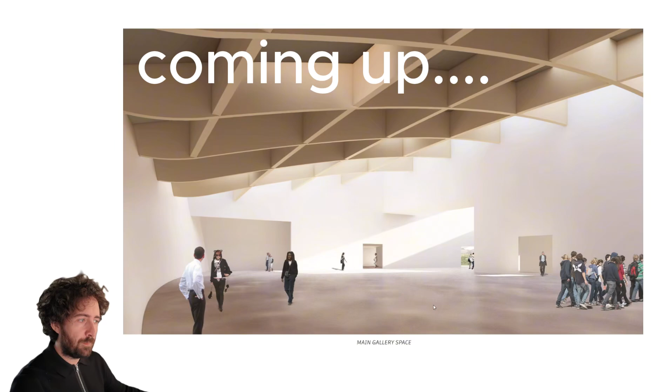I think this is a nice image, but this is a big empty room. What are these people looking at? What have you come to this museum to see?

I can't read this title. I see this little orange translucent fish-looking thing here, but it looks really nice actually, I think. So we have a roof garden, we have this big opening here, we have a canopy there, so that is the entrance. So that's a good image too.

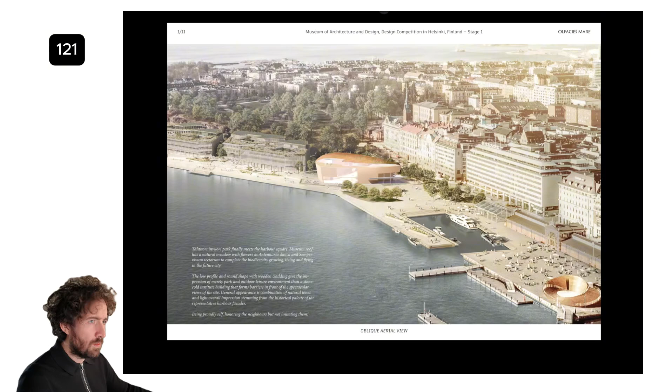New museum gathers its inspiration from a modest Nordic approach. Nordic?

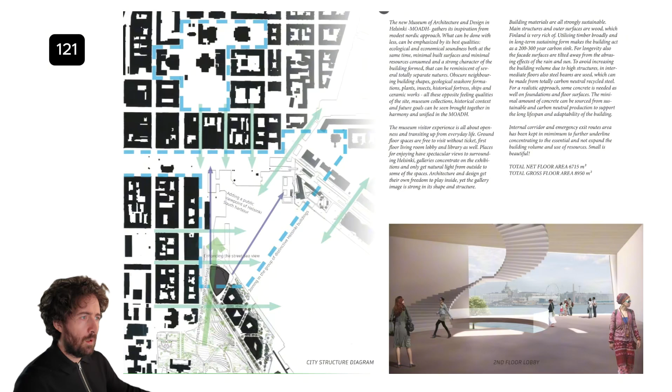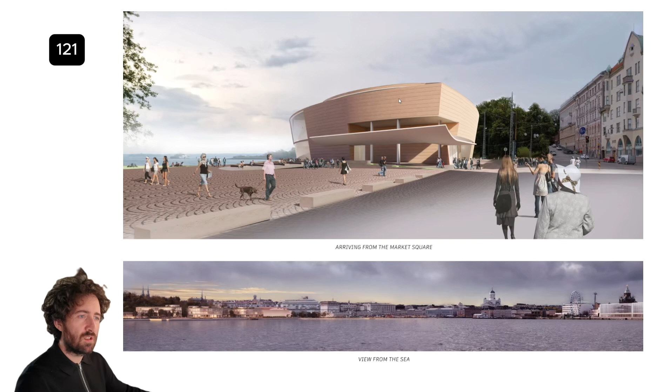Image three, really big swoopy canopy here. It looks a bit bare, like it's sort of missing some stuff. Not a lot of real detail in it.

Image four. I like this interior space, I like the parametric coffered ceiling. I just wonder why this is solid here. Wouldn't this be more interesting if the light could come in through the ceiling? I think it sort of does that here and here, but not everywhere else.

I think this is a nice image, but this is a big empty room. What are these people looking at? What have you come to this museum to see? It's a little bit like, is the room itself the exhibition? Have these students come for a study trip to see the space, or have they come to see the contents of the museum? There's nothing here. It's a nice space, there's nothing here.

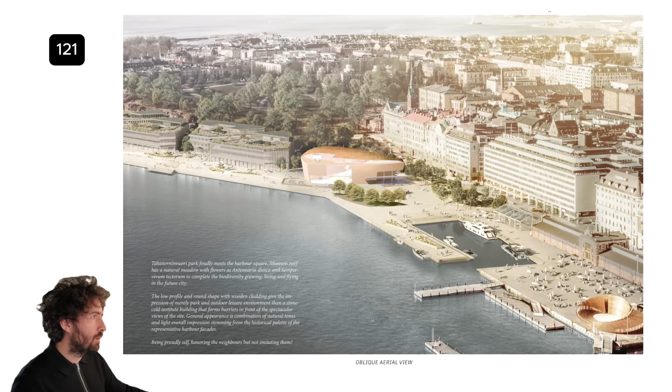122, People's Podium. Yeah, seeing quite a lot of podiums. Again we're doing a turn around. A lot of stairs. I'm sure someone in the comments will say there's a lift inside that can take you up here. That's not the point, and if people haven't caught on yet, that's not the point I'm making when I'm critical of these big, giant external stairs. I don't know what else to say.

Interesting though, I don't think this looks that bad overall. It is a design podium that showcases Finnish architecture. Oh, that's cool, like a little bit of a sculpture garden thing happening here.

Much more. There's not a lot of X factor to these proposals that do this, that make this move. I'm yet to see one anyway. A lot of architects are doing it.

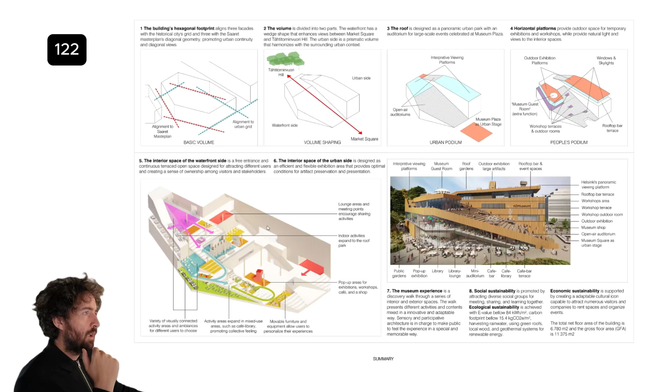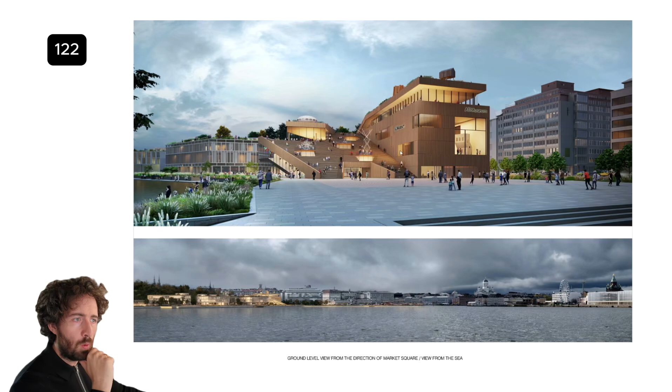It's a nice image, yeah, nice to see some actual gallery content in here. I like this little treehouse up here. This is cool, I wonder who gets to stay there overnight. Oh, I'm just joking. Little UFO dude, love it. Nice image overall.

Yeah, I do feel sometimes like Snohetta have just kind of broken public space design in general, in that everyone sort of makes these kind of moves now.

What's he doing down here? He should watch my videos.

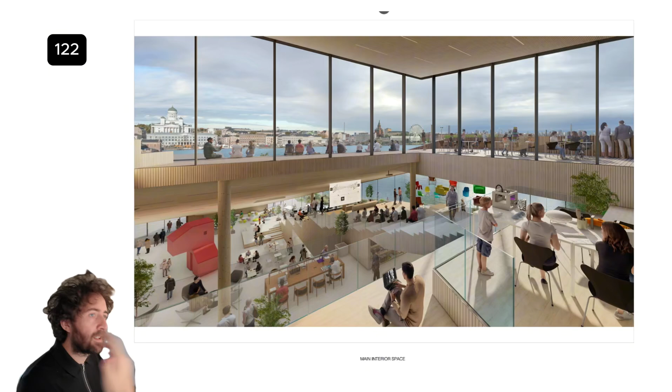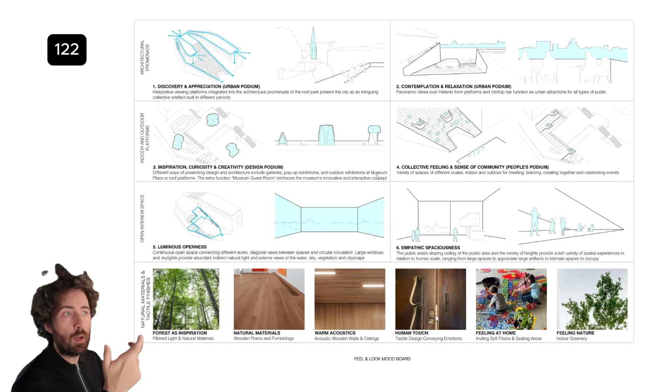But it's not bad. It's a good image, good professional image. It's just the design isn't really getting me excited. A lot of diagrams, clear diagrams, all very nice. I think this is a perfectly competent project, it's just I've seen versions of it already, some way worse, some way better. It hasn't really distinguished itself in the 122 that I've reviewed so far.

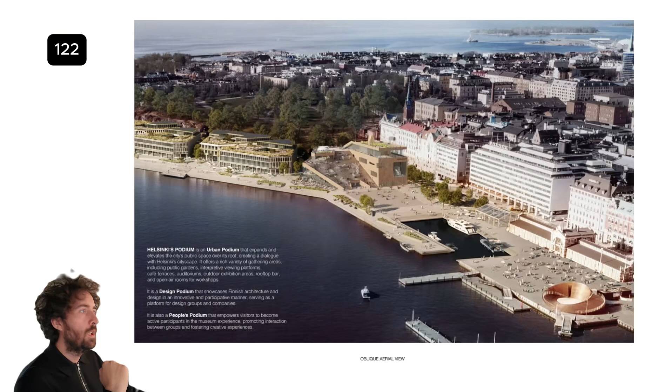But that's not your fault, it's just the order in which I've come across your project. Moving on to the next one.

123, the Little Proteus. I always find, okay, seeing Aalto Vase here, but I always do find that the projects that make this kind of isolated, curvy, circular block with the vertical facade elements generally underwhelm me every time. But let's have a look here. This one has a little bit of spice in it, in that there's a setback and there's a nice colonnade here, which looks quite nice. I do see the reference quite clearly in this, maybe I'll be proven wrong, but this one could be quite nice.

So let's see, image two, design concept. Looks a bit like an intestinal tract or something, like a squashed little pipe. Looks very bioorganic or something.

I don't know how you would resolve these really extremely acute angular details in here. I'm not really sure how these spaces would actually feel. I wonder if there wasn't a way.

I find it really interesting that the geometry of the external skin is actually almost applied in a parallel way to the inner skin, and I don't think that was probably required. For example, let's just imagine this as one solid mass and ignore the central courtyard. I bet there was some flexibility here to make something different in here, even just in terms of shape, because what they've done is they've actually continued this on the inside as well. And it makes for these really uncomfortable spaces, although the structural details might be quite interesting.

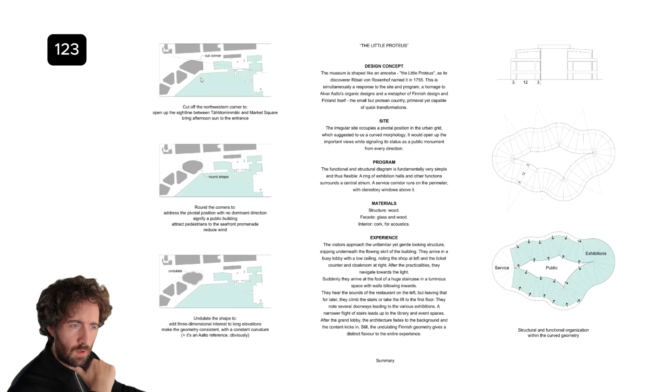There's some nice process diagrams here explaining how they've arrived at the shape. See, undulate - it is funny. Okay, maybe I'm being unfair, maybe there will be zero reference to the Aalto Vase in this project, but you don't need to explain to me how you've ended up here, because I kind of think I already know how you've ended up here.

But that's okay. Image three - I think this is really nice and playful. Yeah, it just looks really, it looks fine. It's quite peaceful, it's quite playful. It looks well considered from the outside.

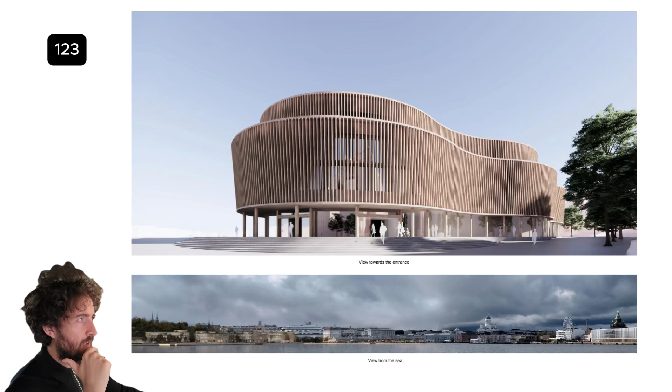I do wonder though, it looks to be that there's an internal lining in here through the screen, almost like there's another grid in behind this. And I do wonder about the quality of daylight. I also wonder about how that space feels on the inside, that verticality being so relentless. I'm always concerned about spaces feeling prison-like, and there's not a lot of opportunity here really to offer a view anywhere else unless I'm reading this wrong. It's quite relentless. It would be nice to see this sort of language, this rhythm, disrupted occasionally to free up some window space, some openings, just to give people a little bit of a breather, because this might be quite an intense space to be inside, especially on an overcast day.

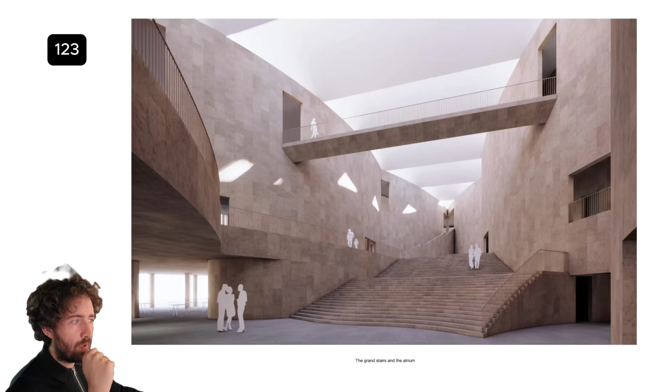Well, it is quite an intense space. Actually, this is really cool. I think I like this quite a lot. Again, though, you can see this here.

There is absolutely a little architectural game being played here, but I don't know if I want to give the architects credit that that was the intent rather than the consequence of the decisions they've made with the massing, in that I do sort of love how this threshold here is mirrored and it's pivoted on a singular column that resolves this super tight little pocket here that creates this opening above it. The little architecture nerd in me sort of wants to dissect this alone and just ignore everything else and think about that as the basis of an architectural project. But I will not be doing that here. So maybe I'll give you the benefit of the doubt and think there was some type of rationale involved, but I actually just think it's a consequence of some of the more fussier details in the project.

This is quite nice. It's a really interesting project. Maybe it feels quite cold in a way, although the tones are quite warm - the daylight here looks quite warm, but I mean cold in that it's quite raw and quite stiff. I don't know, maybe it's the stone.

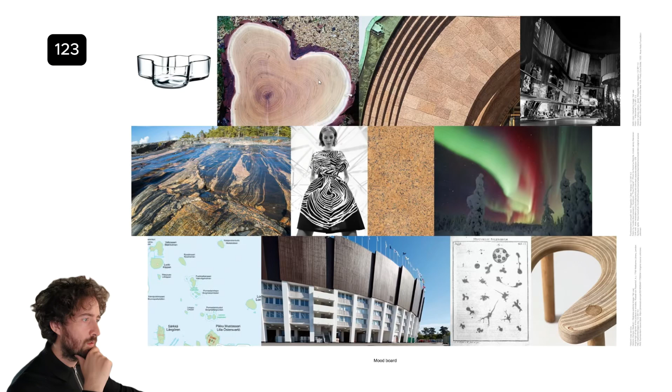Panels here, the cladding that's being used - I think this is really cool. I quite like this interior space. References - oh, that's a nice reference as well. Yeah, some Aalto going on.

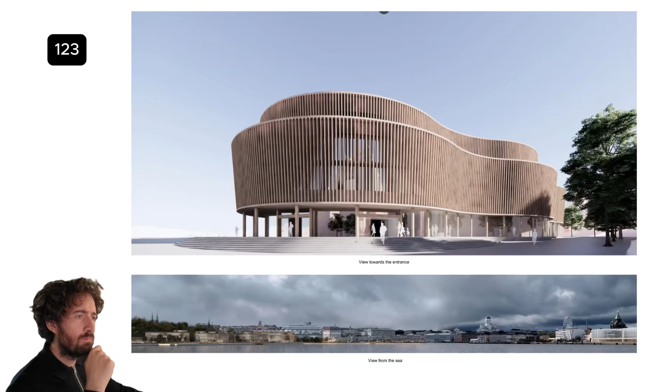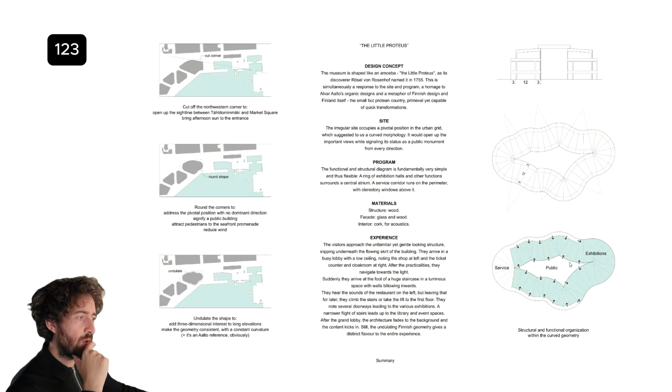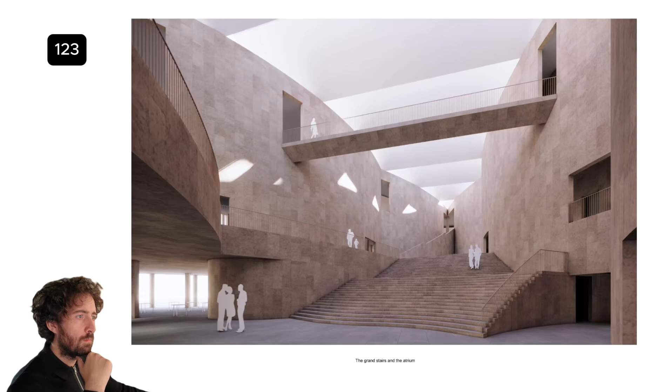I wish this one had a bit more time. Not a big fan really of the inner lining, although seeing the internal lobby, the interior, that's really exciting. I never would have guessed that space would have been as resolved as it is based on this diagram, but kudos to you, architects. Needs more, I think, overall.

But as a piece of architecture, I think it's got potential big time. So yeah, I think I like 1, 2, 3. So nice. Gonna move on. 1, 2, 4. ADM 360. Big green roof, big circular opens, big undulating facade, multiple little volumes here, lots of green space outside. It looks a little bit like a golf course.

Nothing is as dangerous in architecture as dealing with separated problems. If we split life into separated problems, we split the possibilities to make good building art. Alvar Aalto. Who am I to dispute the late, great Alvar Aalto? Dealing with complexity is the fundamental task of the architect's work, unless that complexity is self-imposed, which I would argue is often the case with a lot of these projects, but I will bite.

Let's see what we got next. Image 2. Yeah, nice photographs. Interesting, complicated diagram. And I think you have a complicated diagram because from looking at the massing here, you have a complicated project.

There are a lot of little pieces, a lot of these little cuts, and a lot of these little nooks and crannies suggest to me that this has primarily been designed in plan, and then it has sort of been applied then to 3D in a weird way. It's almost as if the plan has been sort of projected into this 3D mass. Now, I'm not going to critique anyone's individual design process. It's just that's how I'm reading this, and that you can almost see the brief, the programmatic brief in 3D sort of applied to these spaces, and there's not a lot of flow between them.

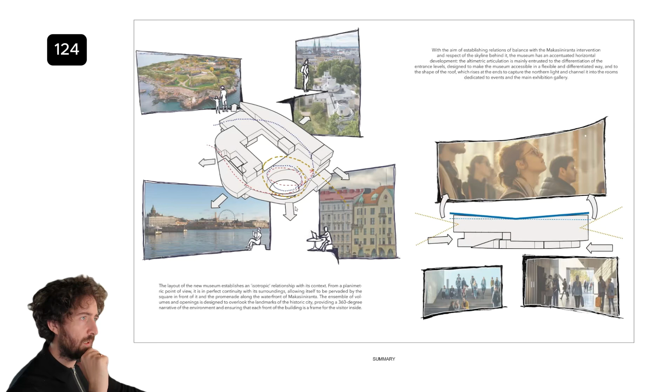I'm going to hold off on being too critical of how the tree would actually work and grow, but I think that looks like a beautiful little space, although it could be quite dark. But I think this is a nice idea. And then that sort of goes into this curvy space that has this interesting diagrid-like screen with these openings above it. I think there are a lot of big architectural ideas here. I'm just not so satisfied that it's all coming together in a way that's super clear.

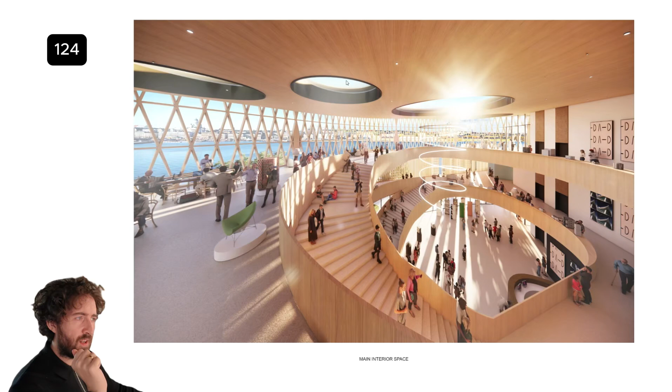Less exciting on the inside, but it might be to do with the quality of the image. Not a big fan of lens flares in general. It's fine, it's good. I think it has potential.

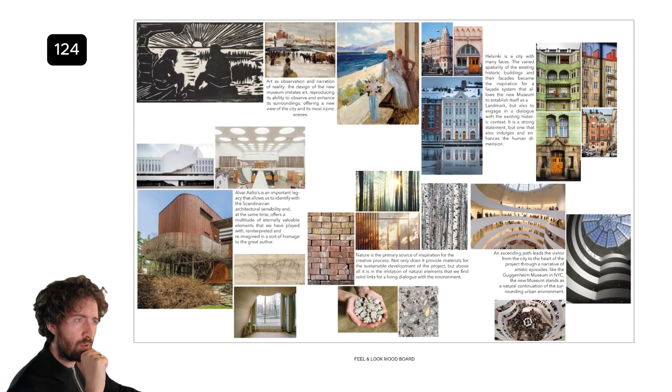Like the last one, some really nice references. I love it when there's some classical paintings included, just like paintings in general. Good, don't love it, a lot of questions. I think it probably, rightfully, as they all do, needs another revision, another level of work. They might not get that. They might not be invited to stage 2. That's fair enough. Not bad work.

Just one, yeah, like for example, this little thing here. It's so subtle, I almost wish this sort of idea was applied to the entire scale of the project. This idea of disrupting the mass with these pockets of open air light wells instead of having these kind of artificial light wells. That seems to be what is most architecturally intriguing to me, this corner. I wish that was applied to everything. But I'm not the architect, I didn't design it, it's just my opinion.

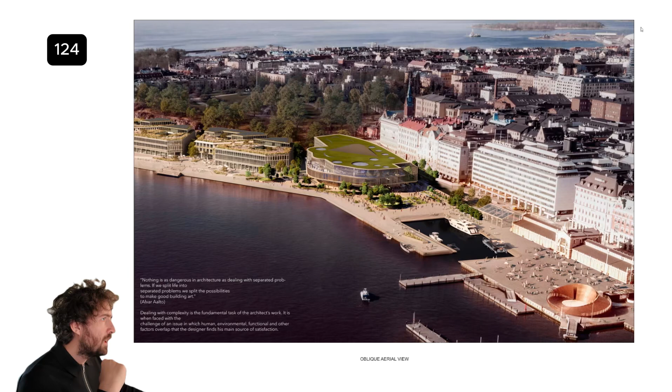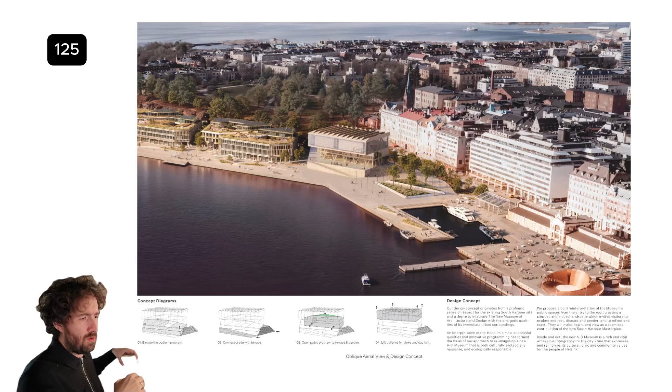Anyone who's noticing, I'm not drinking coffee today, I'm drinking water because I am over caffeinated. Way too caffeinated. Joke, I'm still drinking coffee. Don't be ridiculous.

Okay, this looks really cool. Already I sort of like the way that it's sort of just positioned here on the site. Diagrams look sort of interesting.

Explain to me your design concept, number 125. Originates from a profound sense of respect for the existing South Harbour. An interpretation of the museum's most successful qualities. Fair enough. Let's see image 2.

Again, this one isn't... I do feel like Project 111 was not as well received on the last video as maybe I thought it might be, but I do think that they have done quite well. That's a very good example of a project that resolves the complexity of the geometry of the site. I'm not saying this one doesn't do it. It's just you can see here that when you place something quite orthogonal, even at an angle, you're left with these triangular wedges that sort of need to be resolved.

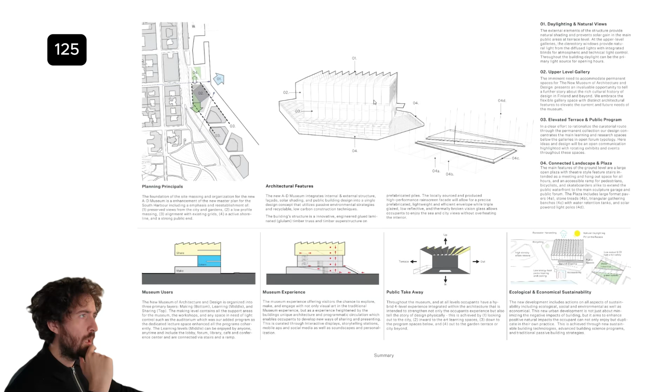I like the roof profile, the sawtooth roof. Looks pretty good. Real technical page here, but I can still see the massing, so that's interesting. Image 3, I actually really like this. I'm a fan, I don't know what you guys think.

This looks kind of cool. A lot of, for example, you have these structural elements, like these giant trusses presumably made out of wood, and the way that they relate with this horizontal stone banding. And then you have this cantilevering gallery.

I like the way that the lettering's been applied to the facade. There's different degrees of visibility around different aspects of the facade. This looks like some type of corrugated glazing here, maybe polycarbonate, I don't know if it's plastic. And then this looks like traditional solid glazing. It looks like some really beautiful ceiling structure articulated here.

Let me see, I like this space here on the outside. Big ramp. I mean, I'm always crying about the stairs, like what about the ramp? And then you look at the ramp, and assuming it's up to regs and standard and made correctly, it still looks quite steep.

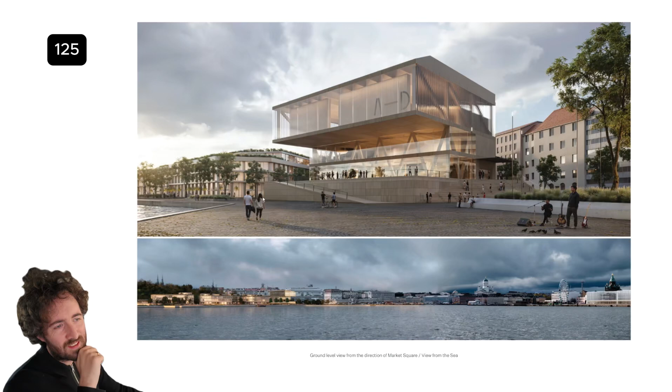This sort of thing here is quite defensive out towards the harbour. But I do like the way that the building is elevated on a plinth. I do love that quite a bit. Canopy here, entrance looks quite easy to read. I really like this. Image 4.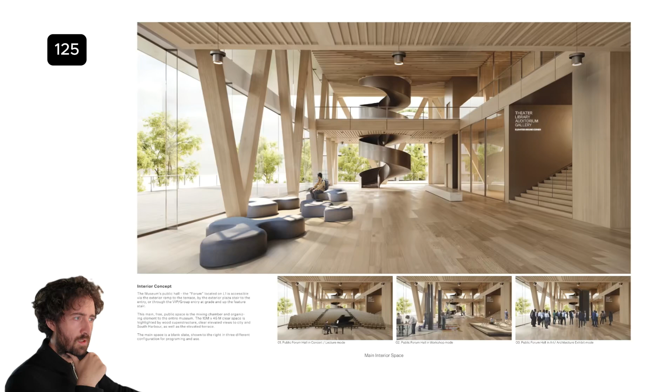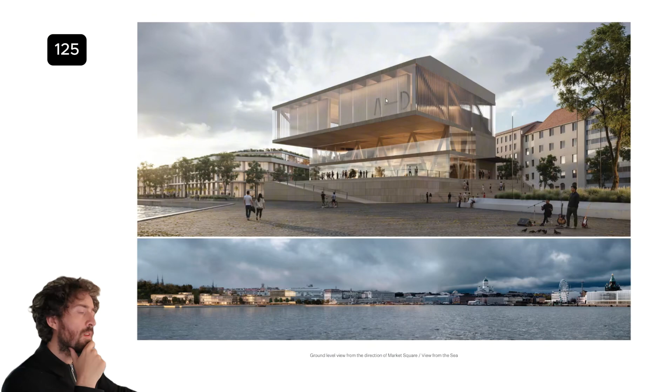Generally I'd say the projects that include the blockbuster architectural masterpieces from the 20th century usually let themselves down. But in this case, the use of Säynätsalo, if I'm saying that correctly, is applicable in that the entire project is elevated from the ground, which they've sort of done here, but maybe it's not as applicable. They're not literally saying our building is like that building, they're just saying look, we've studied some of the finest examples of architecture Finland has to offer in the last 150 years, and we thought we might reference that a little bit here. Well done, really love this one.

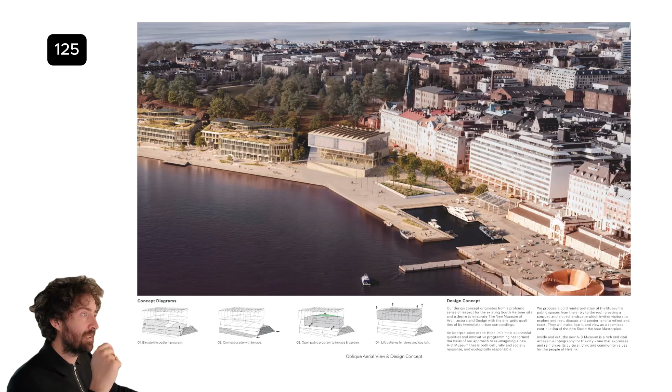125, awesome stuff. Again, maybe I'm way off and people will disagree in the comments, but my taste is my taste. So 125, well done. 126, the mountain.

The mountain. Did I just get a text? Am I in trouble? Nope, I'm good, good, good, good.

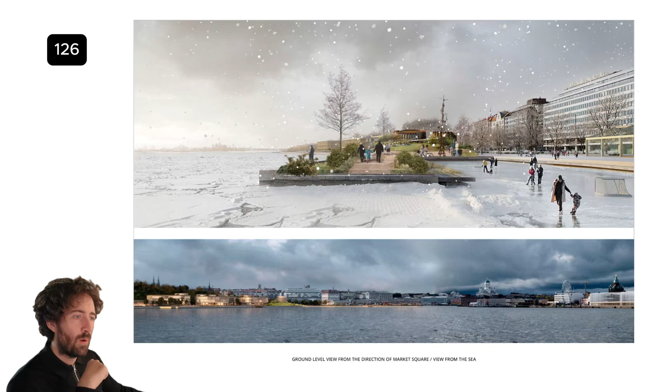Image three. I have the same general criticism for this as I've had for all of them. I just don't know how feasible these types of projects are. You're looking at a 20-year investment, hoping it becomes as beautiful, lush, and organic as your CGI suggests. I don't think that's a sustainable way of bidding for a competition.

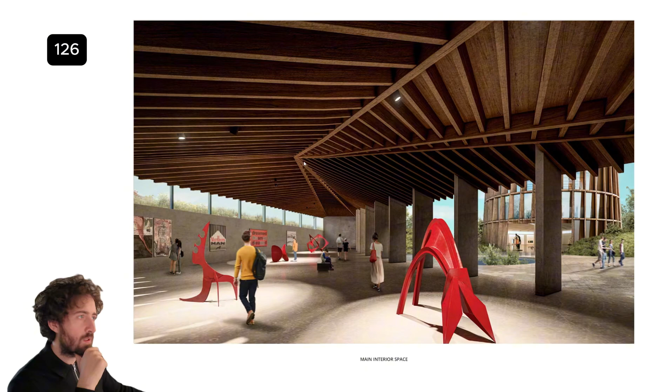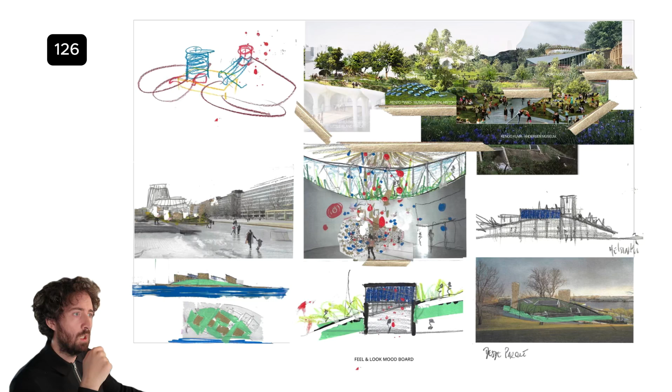Image five. Nice images, nice sketches. I think this is quite a playful project, and I think it's very sincere. These architects really stuck to their guns and went for what they wanted. These diagrams are quite nice. I just don't think it's a winner, for the same reasons I have issues with any project that provides these artificial mountain landscapes. But this looks like good work. Just don't think it will win.

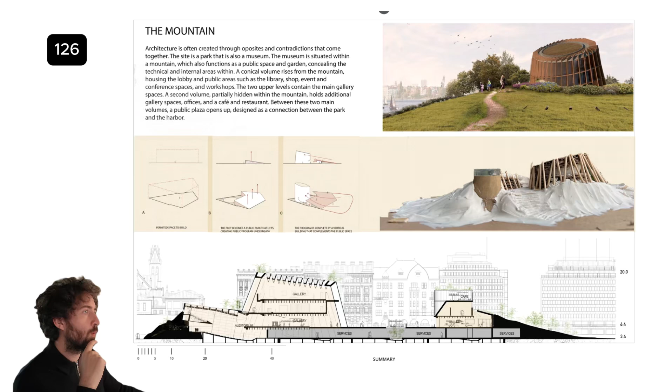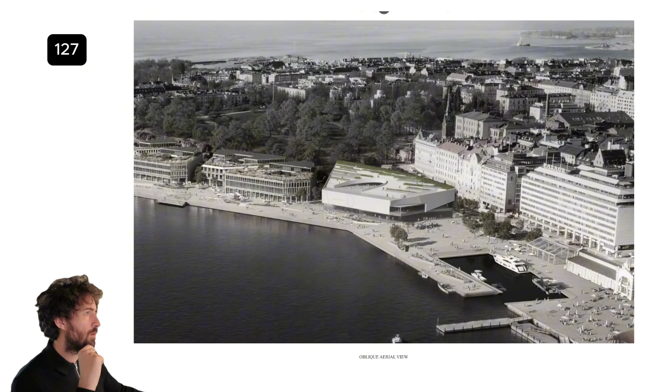Image three. I like parts of it, I just don't know what the parts are that I like. I think this piece is a bit too big, but I like this opening here, and I like the homogeneous, solid nature of it, which makes these openings really impactful. But, for example, is that like an auditorium? It sort of reads a little bit like one, but then I don't know if that was part of the brief.

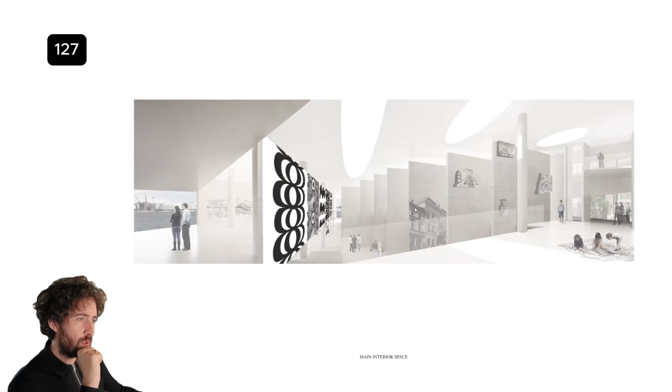Image four. Nice collage-like images, always a fan of that. Gives me a real flavor for the space. Some swoopy openings up here. Nice.

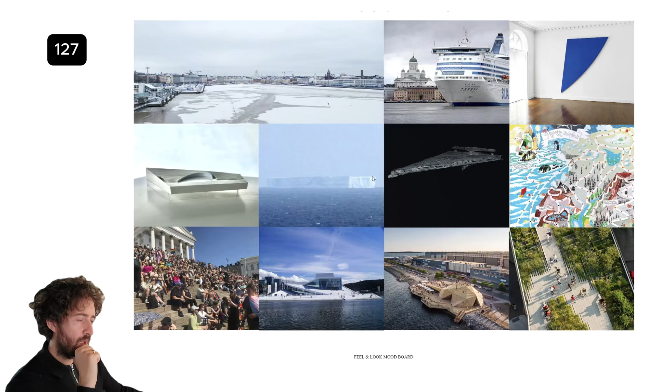References: a big cruise ship as a reference, an iceberg as a reference, a Star Wars spaceship reference, a Snohetta reference.

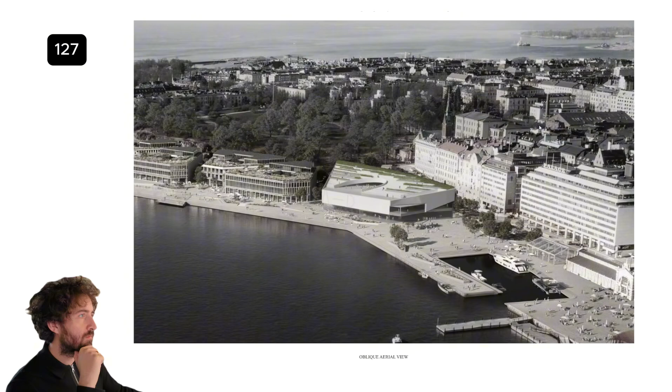I think it's fine, though it's lacking a lot of detail. It's okay, yeah, it's fine. I don't think it's gonna win, I don't think I'd pick it as a winner, but I think it's fine. Good, good. 128.

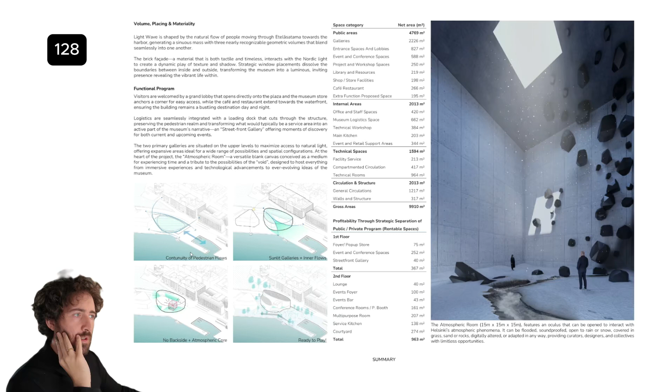I think it looks interesting. I don't think I'm going to ding it for my personal preference, like something I don't agree with. I think this looks actually really interesting.

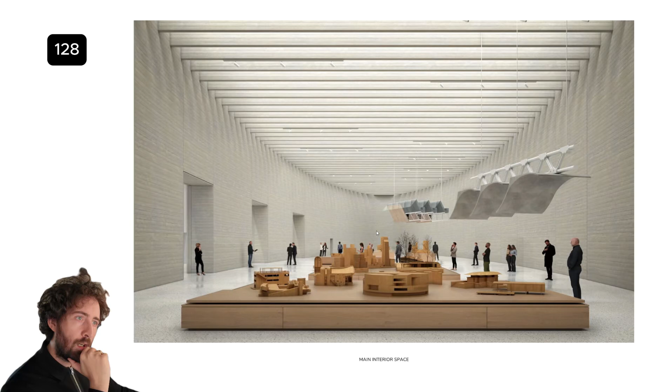Image four, this interior image is fantastic, absolutely beautiful. The way the light works here is just fantastic. There's consideration for how the openings work with the material - I love that, I like seeing the joints. There's real consideration for detail here.

The space is incredible, fantastic. I'm seeing the lights - the physical gallery lights in here.

I wonder about the spacing of the horizontal beams, maybe it's a bit unnecessary. I don't know, but I wasn't the architect. There's quite a lot, although the effect is fantastic.

Space is incredible - this is sort of winning me over big time. I want to go back again. Yeah, again, another incredible space. But where does this occur in the plan?

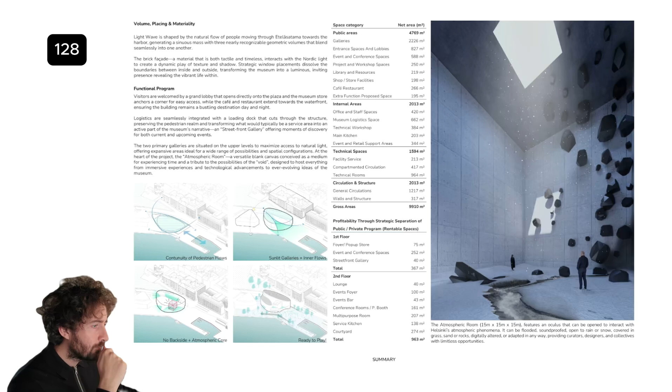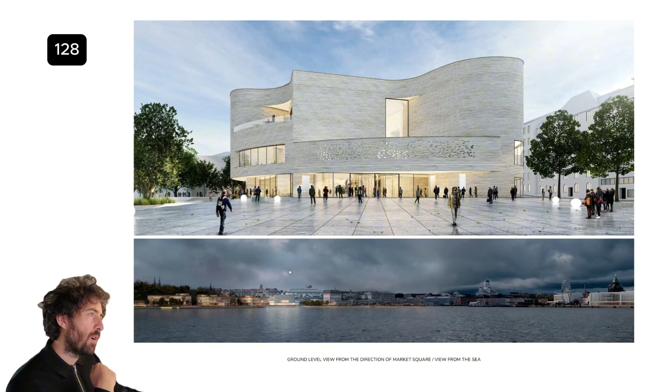My biggest gripe with this project is that it's very big and chunky, quite dominant. I do wonder, obviously the architects who designed this interior space are very good architects and knew what they were doing, so I'm not being critical. It's more that this all reads like one type of project, but the effect just doesn't work in the aerial image.

Maybe the problem I have is just the aerial image. It looks more disrupted, there's less harmony in the aerial view, like it's broken up into different pieces, whereas here it looks quite confident as one building. This to this is very good.

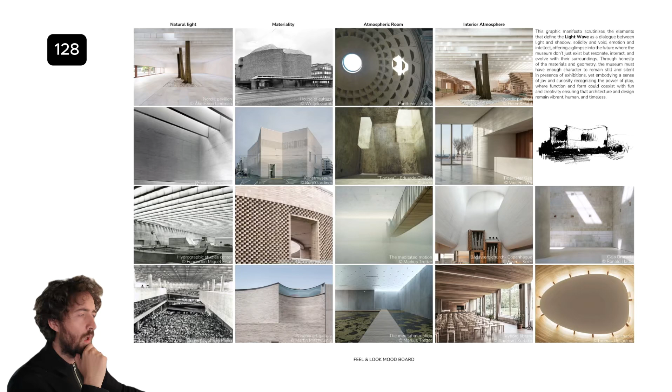Image five references again, very great references. Beautiful little sketch, I love that sketch. I think this is a very good project. I just wish I hadn't seen the first aerial image because it set the tone for me, but that's my fault. So, 128, beautiful work, really like this. There's been some good ones in this 10.

Okay, going on to the next one. 129, urban lanterns. This looks a bit scary, but these look quite cool. Three little boxes, or two big boxes and one smaller box. Image two, diagrams, typical neighboring building, split by a curve. Why would you split it by a curve?

Rotated, new museum typology. I'd always be weary of any project proposing a new museum typology, just in that we know certain museum typologies work. Do one of those. I'm not trying to stand in the way of your creative freedom, I just don't make life difficult.

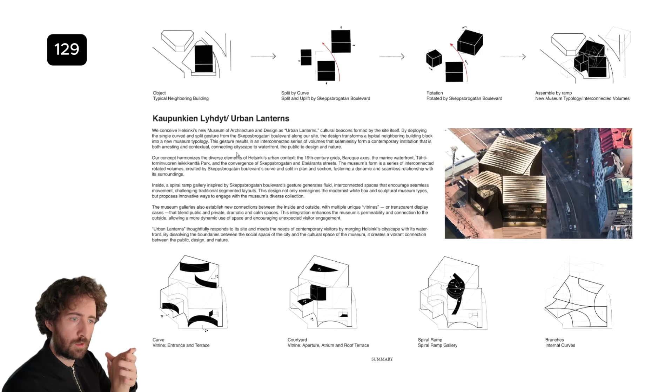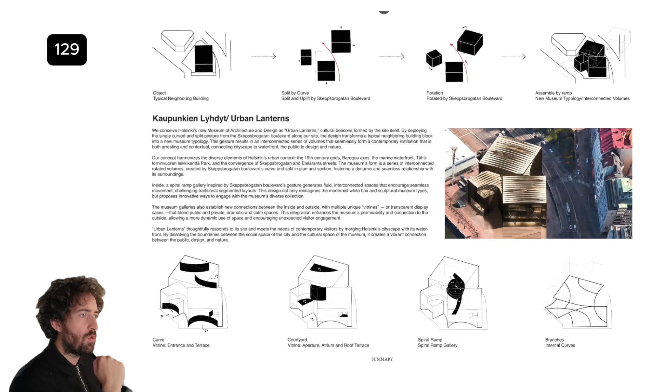Cultural beacons formed by the site itself, deploying the single curved and split gesture from the Skeppsbrogatan Boulevard. Really nice diagrams. I wonder whether or not the curved aspects of this project are required. Image three, yeah, I like the screen, and then I like the openings. I kind of like this.

Image four, not so sure how this works. This under here is usually what I define as dead space, it can't really be used for anything. You can imagine a little kid crawling under here and getting stuck. I would have got stuck under there when I was a kid.

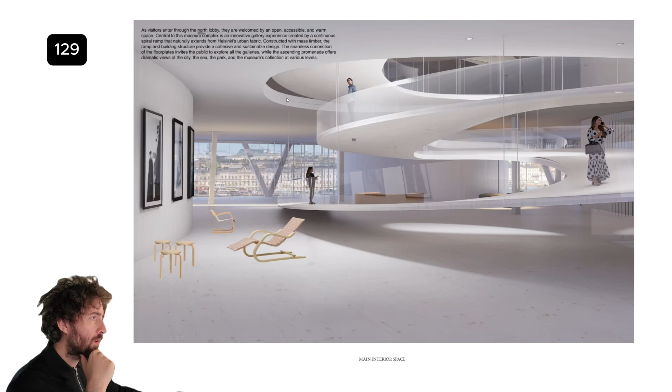Again, lack of resolution here. Maybe too much of the 3D model is apparent in this image. Nice view out of the city. References are nice, I think it's fine. It isn't blowing me away. I don't think it's a bad project, I think there's some really big ideas. Just in the 5 images, I haven't fallen in love with it. I might come back to it another time.

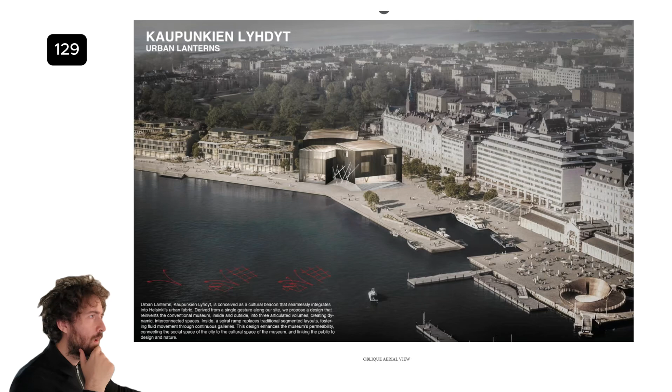So that's project 129, and now we're going to 130, permanence. Okay.

This looks like a little greenhouse, but I don't think that's a bad thing. I like the facade, looks interesting. I like the timber structure being expressed through the external lining. Quite nice, I actually like the volume of it, this little trapezoid dude. Image two, oh, beautiful image.

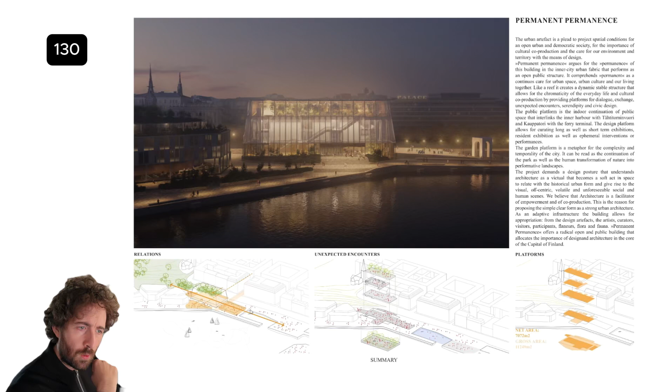The urban artifact is a plea to project spatial conditions for an open, urban, and democratic society. It's a bit lofty. Nice diagrams here. This seems to be a diagram focused on connecting the park to the plaza, which is good because I don't think a lot of projects have done that. Well considered, unexpected encounters, platforms, all good. This image is gorgeous, beautiful image.

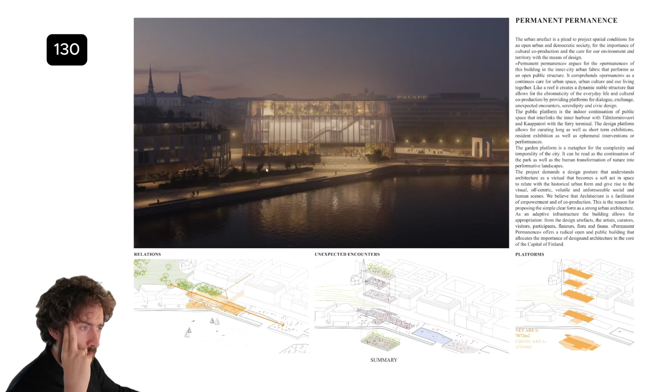Image 3, this one is not so much, a little bit darker, a little bit gloomier. Beautiful image down here as well. They're absolutely playing a game here with the articulation of the facade and the structure, with these sort of modular bays. I just wonder why the central bay is the taller one and not the bottom one, but that's just a question I have. There seems to be this interpretation of a traditional order, and then they've played around with it a little bit, but that's fine. I quite like this one.

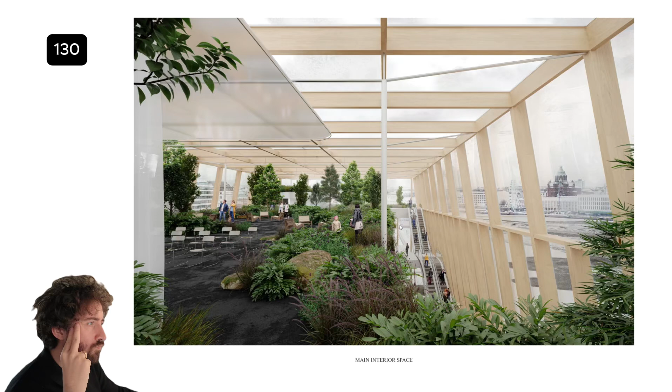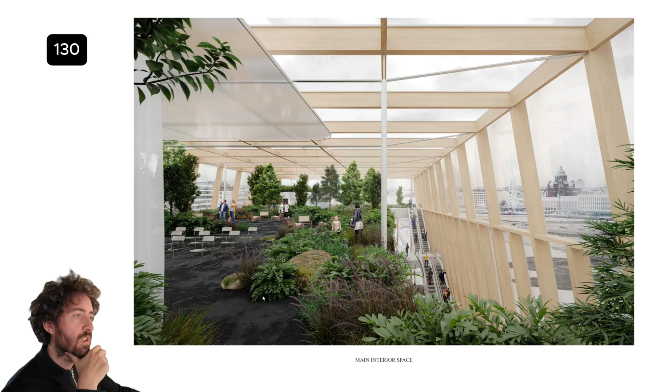Image 4, interior. I like it. My worry with this image is I can feel, like, my feet getting dirt on them, getting a bit dirty. This looks like a bit of a dirty space here. This looks beautiful and clean.

Yeah, this is a really nice graphic. I like this too, I think this is a good project. This 10's been good, I think anyway, I don't know what you guys think. Yeah, this is good, good as well. Okay, so that's another 10, another episode.